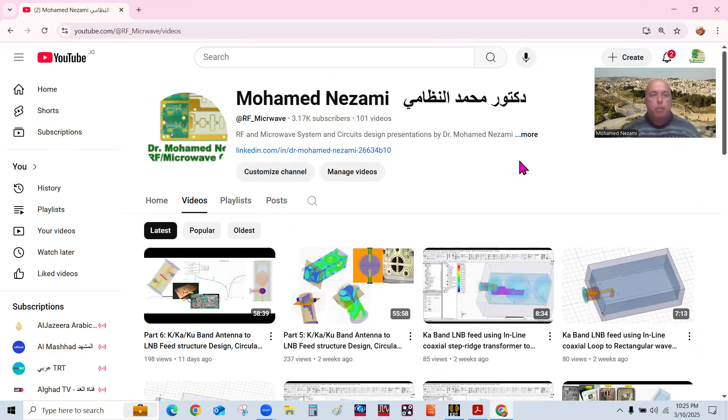Welcome back. If this is your first time watching one of my videos, I have this YouTube channel with all these videos, and I've been doing a series on KA, KU band antenna to LNB structure design, illustrating the design of the feed mechanism that goes between the horn antenna and the LNB, and the IF signal that goes down to the indoor unit, to the demodulator or modem. If you're watching this for the first time, I'd urge you to go back to these various parts. Today I'm doing my sixth part, and we're going to cover the design of KU band LNB using two orthogonal probes, pin probes.

So today what we want to cover, just to remind you what we're doing: I'm trying to find a spot for this picture, this icon, where I haven't yet covered the material. Basically, we're interested in designing and modeling the feed part that goes between the horn antenna and the LNB or modem, whichever you call it. It varies from large gateways for deep space, to sat-on-the-move, tactical, military, to VSAT terminals, and also to KU band commercial TV broadcast, direct TV.

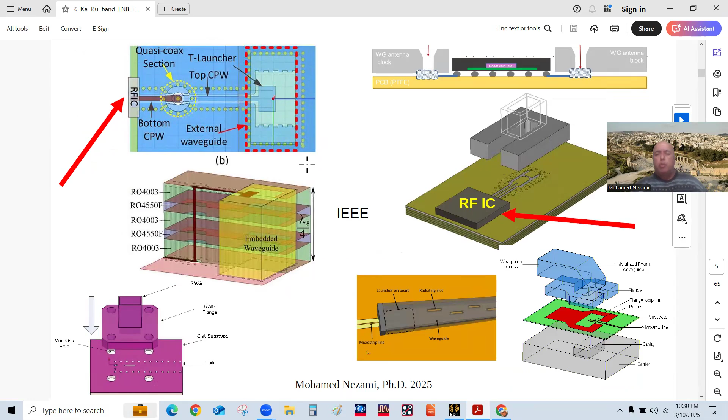The material I cover here, even though it's really intended to work with waveguides feeding from a horn, could also apply elsewhere. In fact, I will start a series in the future for antenna-in-package type systems, where you have an RFIC that you want to connect to an antenna on the same board. This is a technique used right now in flat panel LEO orbit SATCOMs for internet, such as the systems from the United States, from Amazon and from SpaceX. I grabbed these from the IEEE journal, and you can see how the RFIC gets connected to an antenna. This RFIC could be a single unit cell from a two-dimensional array of antennas, or it could be a single device also.

You can see various formations of waveguide to LNB or LNA transitions. Basically, if you look at these feed systems, they're always using a horn antenna that has a circular aperture, so it interfaces either a circular waveguide or a square waveguide.

Circular waveguide, circular waveguide, square waveguide in here. I can't zoom in on this one, but it's probably like this one, where you can see the circular waveguide. So we're dealing with either a square waveguide or a circular waveguide. The lowest frequency dominant mode is the TE11 for circular waveguide, both vertical and horizontal, and the TE01 and TE10 for square waveguide.

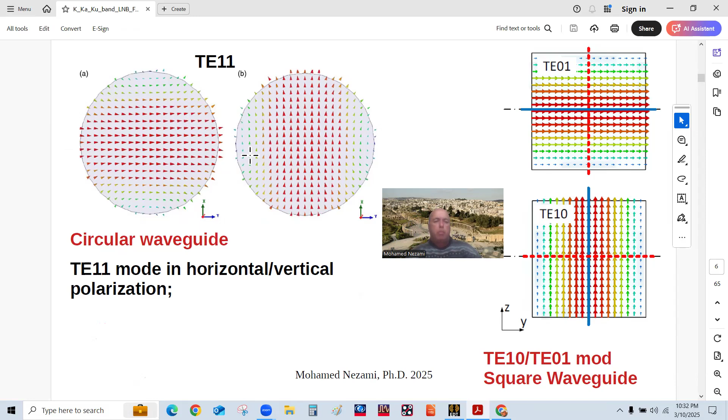I've shown analytically how this one is almost the same as this one, with just a small factor - the cutoff frequency is about 20% more or less between them. You can refer back to my previous videos on this.

So what we covered so far is the LNB feed types, right here - we have five types. The first type is where the circular waveguide comes in, we pick up one polarization here, and the waveguide behind transitions to a rectangular waveguide, feeding this. So you end up picking both vertical and horizontal signals, amplifying and down-converting them to an IF.

The other type is the circular waveguide with a septum polarizer. This septum polarizer is the mechanism by which we separate the two multiplexed signals - literally a diplexer between vertical and horizontal coming from a circularly polarized signal in circular waveguide. We've covered this in one of the videos, you can go back to them.

And then we also covered this one, where in the same plane you get two orthogonal probes, be it printed like this one, or coaxial as in this case. We covered this. So now we're left with this type here and this type here.

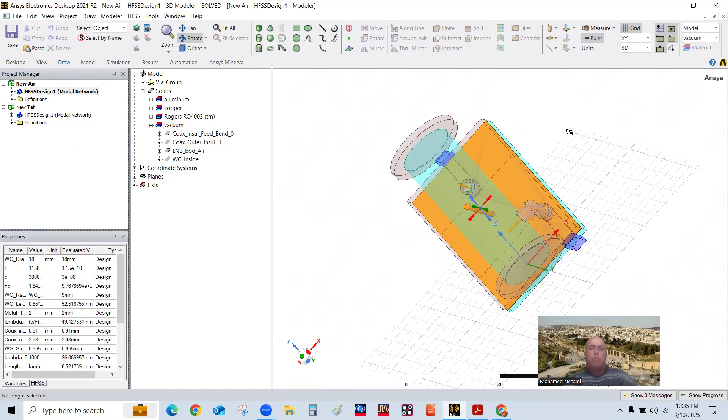All right, so this is basically what we're going to cover. Here's one of the designs I want to talk about today. Basically what this is, as we can see, is we've got a PCB board in here - this is really where the LNB sits.

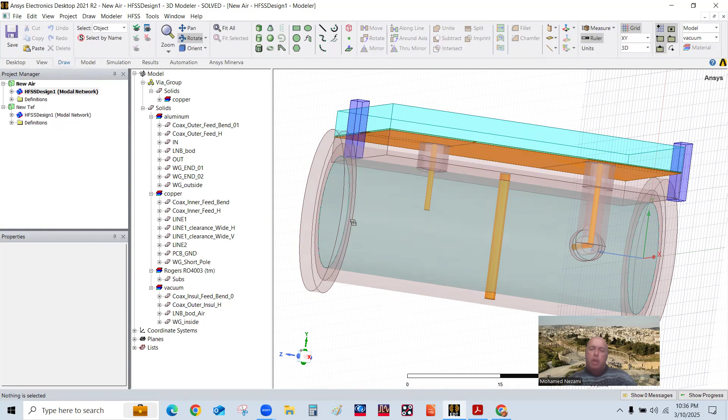I've got two transitions from microstrip to a coaxial-style pin transition that goes down into the circular waveguide. I've got a dowel in here, which is just a metallic pole that acts as a back-end reflector for this polarization, where the other horizontal one doesn't see this at all - it doesn't affect it and goes back, getting picked up by the second probe, which has a 90-degree bend. It comes in on the side, connects, and picks up the signal. This distance here is a quarter wavelength, and this distance is a quarter wavelength - a straightforward design.

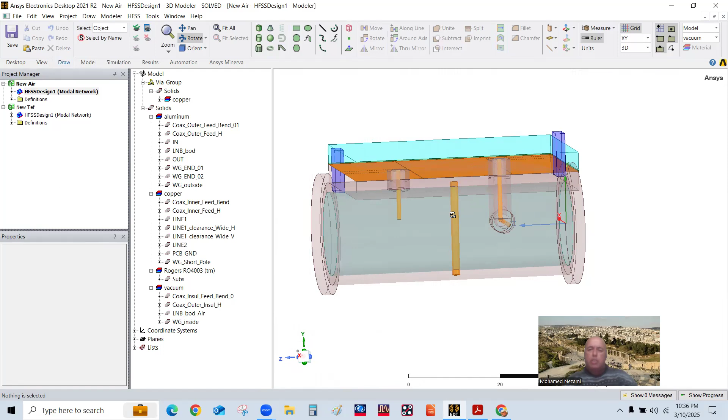The only thing is you have to really be careful about the design of this transition here.

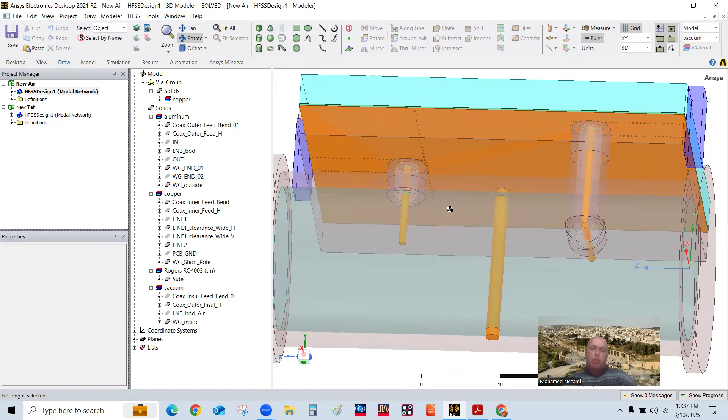As you can see here, I have an opening in the substrate, which is Rogers 4003. I've got a bunch of vias around the connection that connects the probe to the board on top, and source to the trace. This is basically implementing a coaxial transmission line on the PCB, because it's got an outer shield and an inner connector. The outer shield is grounded with vias connecting the top and bottom, and the bottom of the board is basically a ground plane completely. The whole thing sits on a ground slab, as you can see here.

So let's go through the material, this is what we're going to cover today. If you go back to my series videos, we started all the way from basic square and circular waveguide until we got to where we are today. Usually we designed first a septum, then we designed a coaxial to waveguide septum, and then we designed basically a diplexer type to pick up the signal from both vertical and horizontal.

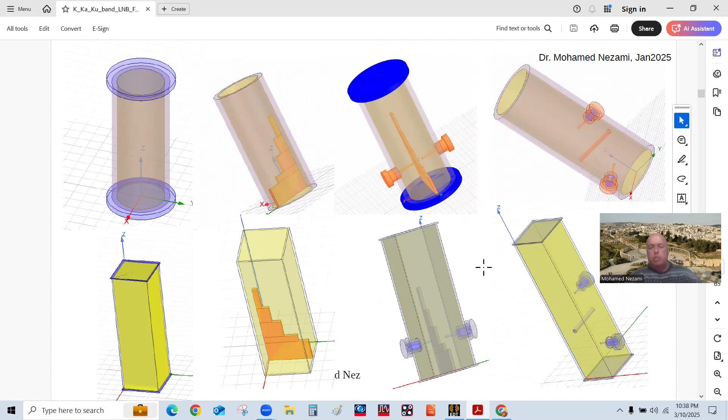So let's look at the first thing today, where we've got the horn antenna in here. The horn antenna collects the signal from the parabolic dish and then goes down into this circular waveguide. There's a little compartment in here where the LNB board sits. This LNB board's IF has an F connector right here, which connects to your indoor modem or SATCOM TV receiver.

And as you can see here is the board, this is basically what's inside once you lift the cover off. You can see it's got one probe in here, which sits right in the middle of the waveguide, and that's really what this one is - that guy right there. We have, well, let me go on the side.

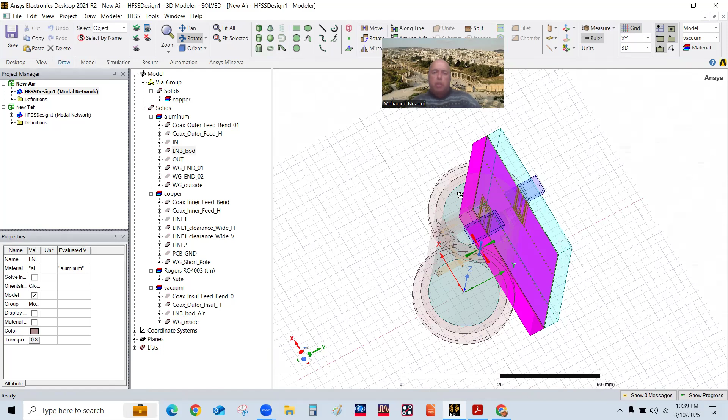So basically if you look in here, there's one probe that goes in right here, and there's another one that comes in that I just showed you. Let's look at it from the bottom view. So we've got this one in here that comes in with a 90 degree, and there's that one right there.

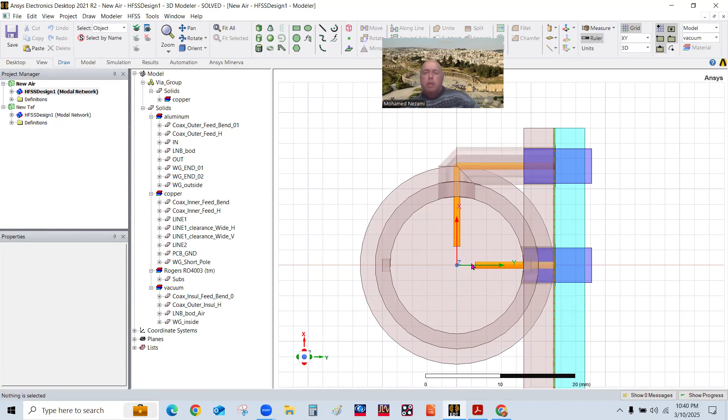Let me hide this, now we can see it more clear. So there's one that goes like this to the board, and there's another one - let me hide this post here - there's another one that is right here. So you can see that these two are basically connecting to the top of the board with the microstrip pickup line, which feeds the signal to these low noise amplifiers. So this one picks up the vertical and this one picks up the horizontal, comes on the side, down and bends 90 degree down.

And you can see their quadrature - so this one in here, if you draw a straight line to here, to the center, and up to the other pin right here, you can see they're 90 degree apart. That's really what we want to pick up the TE11. Now inside the feed horn, the way the interface to the feed horn, of course, we've got you can see them right here through one of the LNBs that I have right here.

I happen to have also right here, and you can see that there are two pins in here. Let me make this larger so we can see it. You can see that there are two poles in there, one vertical, one horizontal.

Between them there is a dowel that goes from top to bottom, which acts as a short back end to the vertical polarization. So we've got the one in here, that's horizontal or vertical, either one - it depends where you flip this. And then this is reversed: this is the vertical, and that's the horizontal, because the horizontal has a flexible slit to go in. This pole in here, this grid pole I call it, acts as a short, a quarter wavelength away from the vertical probe that picks up the signal, where this here is unseen by the horizontal wave that goes in.

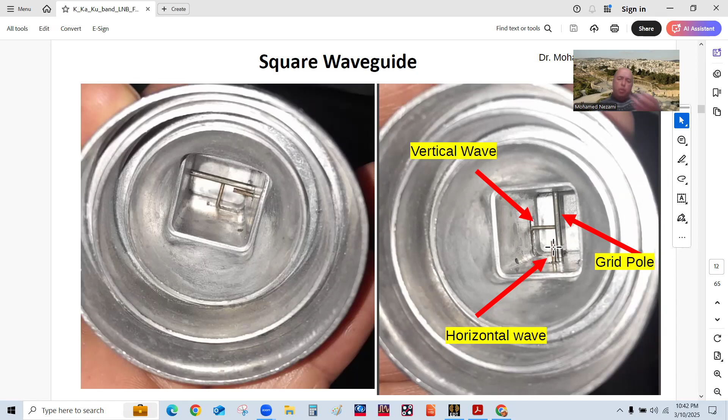So the horizontal wave goes in and doesn't see this pole in here, it just goes in and gets picked up by this. Then in the back of the waveguide, there's a quarter wavelength section, short-ended, that will basically act to reflect back any of the signals that propagate that way. Another view of this, showing you basically the same thing, okay?

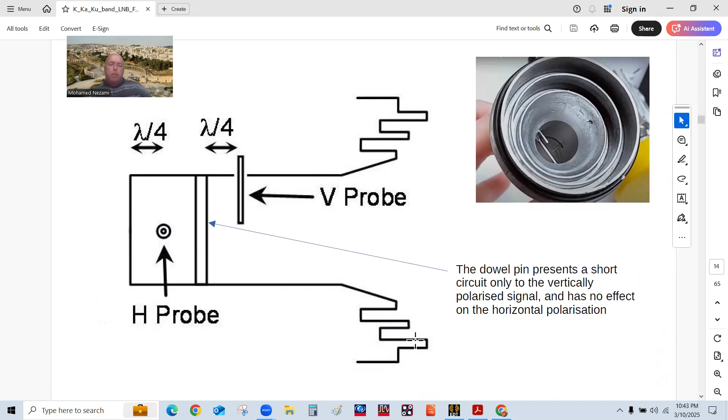Now pictorially, if you were to draw a schematic corresponding to this, we've got the horn, the corrugated walls in here, and then basically the first probe that goes in, okay? At a quarter wavelength away from this in the back, we've got a dowel pin that presents a short circuit only to the vertical polarized signal, and has no effect on the horizontal polarization wave that keeps going and gets picked up by this, which is basically going into the page, into the screen, okay? And then there is another quarter wavelength section shorted right here.

So in essence, if you look at this, the impedance loading from this pin from the back short in here is really open, because a quarter wavelength short, as I will show you in a moment, acts as an open circuit, so it doesn't see this. Yet all the signal goes in and gets reflected back, 90 degrees one way and 90 degrees another way, that's 180 degrees, and gets right in phase, sums up with the original wavefront of the wave.

Now the same thing happens in here. The signal comes in here, hits the probe, gets picked up, the vertical or horizontal one. If anything passes that, it goes right here and sees a short, dead short, and it bounces back and gets reflected in here. Now, likewise, this short here is at a 90-degree electrical length away from the probe, so it acts as an open.

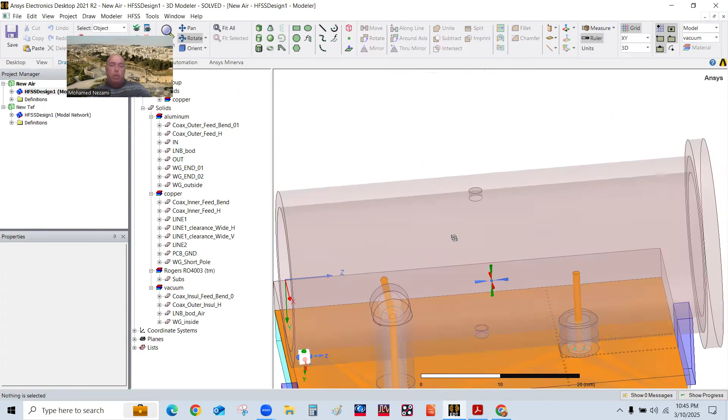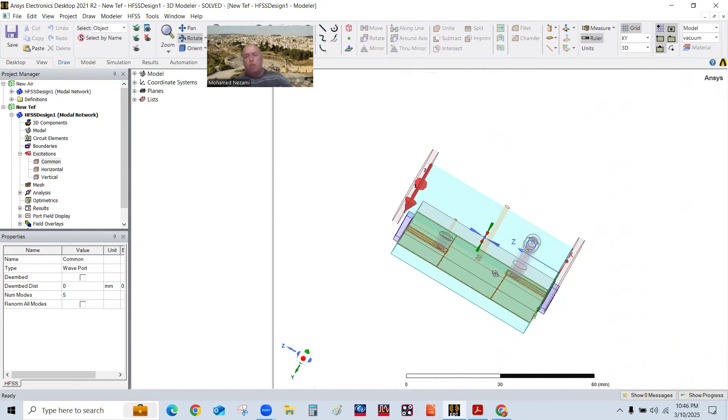For this one in here, you can see that if you were to look at the frequency response, the S21 on both of these, so you come in, let's see, no, not this one, let's start with this one here first. Okay, so we've got this one here, okay. So we've got the signal, the feed comes in through here, both vertical and horizontal. And then I've got another wave I pick up, in this case in here.

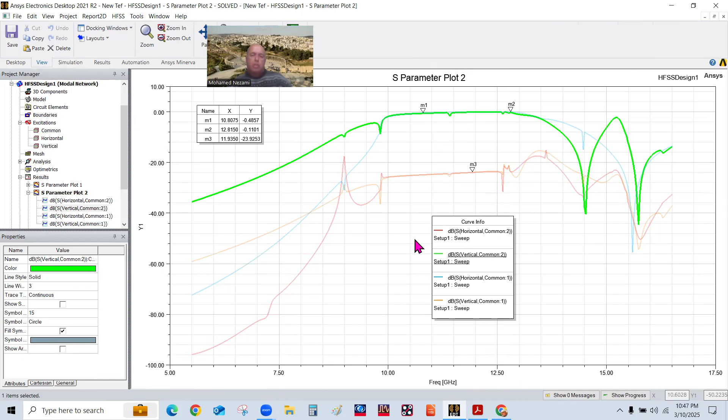What I'm doing, as I will show you in a minute, is de-embedding the transmission line in here, because I made this transmission line much longer than what you really need. You usually pick up the signal in a few tenths of mils to a few tens of mils, then feed right into the LNA, okay? So I will show you in a moment, as you can see here, this is the S21, both from the common mode, common signal, or the circular polarized signal, to the horizontal. So there's nothing for this wave. And for the vertical it's this one. The difference between them, of course, is in the 20s of dBs, and you want to maximize that. So that's the cross polarization considered in this case.

Okay, so let's cover more. Let me maximize the screen in here so we can see this. Okay, so I guess you get the idea of how this acts pictorially. So let's look at the square waveguide ones, okay? Even though today I'm only modeling the circular waveguide.

So basically, here's the board with the cover lifted off. You can see this cylindrical bump here, which is the outside housing for this pin that goes in at a 90-degree bend and picks up the signal for the horizontal portion.

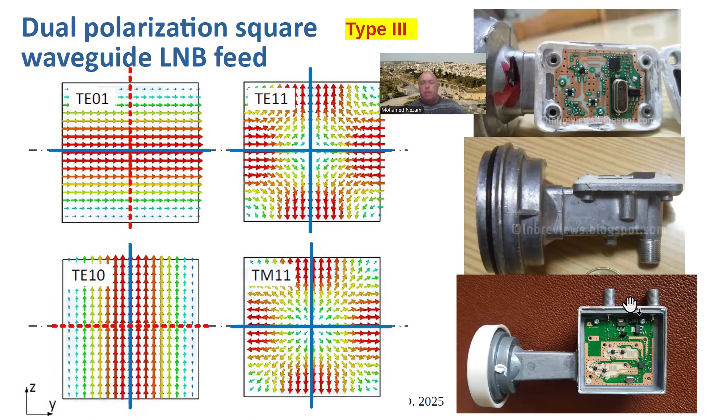Here's another variation, basically the same thing. For the circular one, I went through this a moment ago, so just to repeat: we've got one vertical pin here that goes down to the waveguide, then two stages of LNA MESFET devices, a hairpin filter acting as an image rejection filter, then into the MMIC down converter chip, and then into the IF signal, which goes right here. This here is for DC protection.

This is a Zener diode that clips the DC signal coming in from the indoor unit. Same thing on this side, you've got this pin that goes down and bends 90 degrees to line up and pick up the horizontal signal, then goes through two stages of amplification as well, with the filter here, and then into the low noise block down converter chip.

This contains the phase lock loop and the IF amplification stages, the mixer, and for instance this is the crystal, a 25 megahertz crystal, which acts as a reference for the phase lock loop. In some cases the reference is not internally generated, it comes in from downstairs from the modem, where it's disciplined via GPS

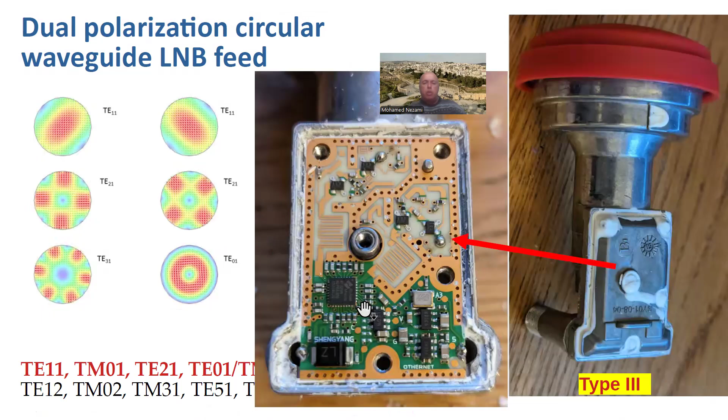Okay. So what I'm going to do in today's session is add a PCB board to this. This one was designed previously - you can go back to my other video where I talked more about this design.

So this is the bottom of the board. We've got the LNB board here, and what you can see is this: one is a vertical pin and one is the 90 degree. The waveguide comes on this way, this goes into it vertically, and this goes horizontally. You end up picking up both of these signals like in this one here and this one here, and you amplify and combine all the way until you go to the IF.

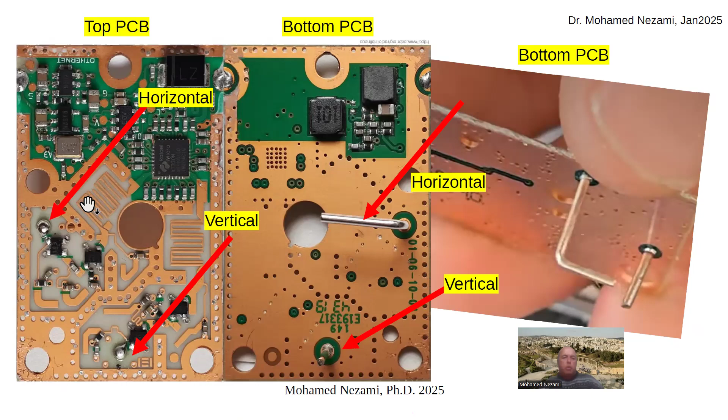Another view of these that I will show you in a moment, so you can see in the bottom both of the probes, okay, and this one uses this MMIC chip.

Another closer look at this type here, which uses a circular one. In this case, what you can see here is they put the reference oscillator, reference crystal, beneath the board. So this is basically what the probes look like that go into the waveguide.

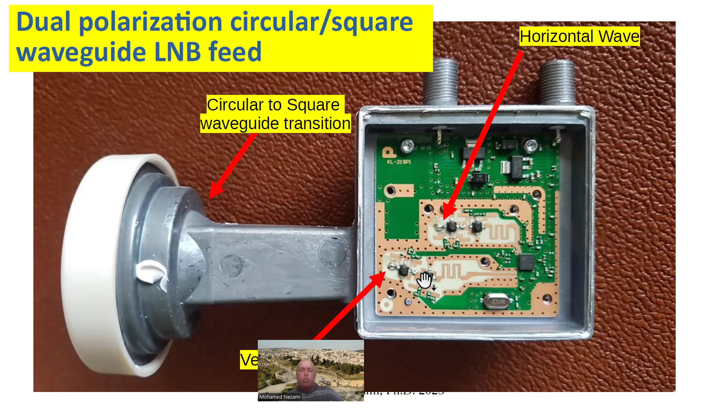Same thing for this one, very much the same. We've got one pin here, one pin here, two stages of amplification, two stages of a hairpin filter, and then onto this one here. Okay, the same thing goes in here, very much the same.

All right, so let's cover some principles quickly. Remember that the cutoff frequency for the circular waveguide is this one here, that's the coefficient from the Bessel function, the lowest order Bessel function, which corresponds to TE11, the lowest frequency dominant mode. And then for the square waveguide, it's really this value here, and this is TE10.

As you can see, it's A and there is no B, all right? And of course, in our case, A and B are equal because it's a square waveguide. And then we're using a microstrip line where the characteristic impedance of the line is dependent on the height to width ratio, and this coefficient in here.

Of course, we got the pins, both these pins are basically modeled as coaxial lines, the way they go through a board, okay? And that's what I did in here, basically. If you look at this guy in here, that's a transmission line, basically. This is it. In here, you can see the purple is basically the insulator, okay? And this is the inner conductor that goes in here.

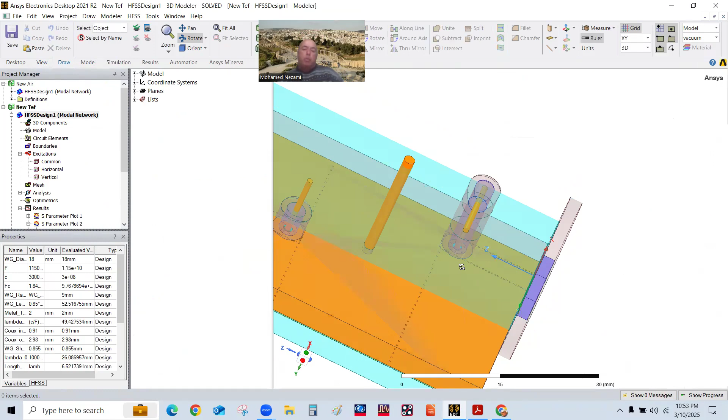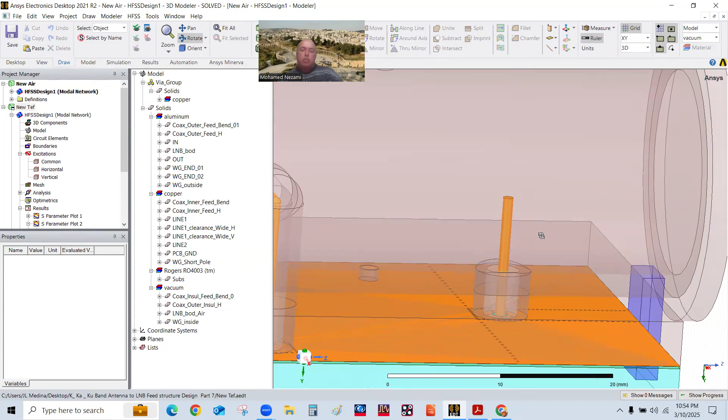So what I did, depending on how you want to do this, is between the inner and the outer, you use an insulator or you don't use an insulator. And that's why I have two designs. I have one called air and one called Teflon. So in this one in here, I did not use an insulator. And so you end up with a lower loss line because basically it's a coaxial line without the insulator - there is no insulation material in there, so there is no dielectric loss.

So you pick up a few tenths of a dB better on insertion loss with this one. And I'm going to show you that in a minute when we get to this.

So if you look at the probe itself, that's how we design it, depending on this - the outer to the inner diameters, and with this coefficient in here with the insulator, the impedance is divided by the square root of the permittivity of the insulator. So if it's air, this is basically 1. And the cutoff frequency is given by this.

Okay, so where do we put the probe? I went through this in the previous videos. So basically, if you look at the propagation of the E field and the magnetic field in the TE10 mode, you can see that the amplitude of the E field and the H field is really proportional to a sine wave signal.

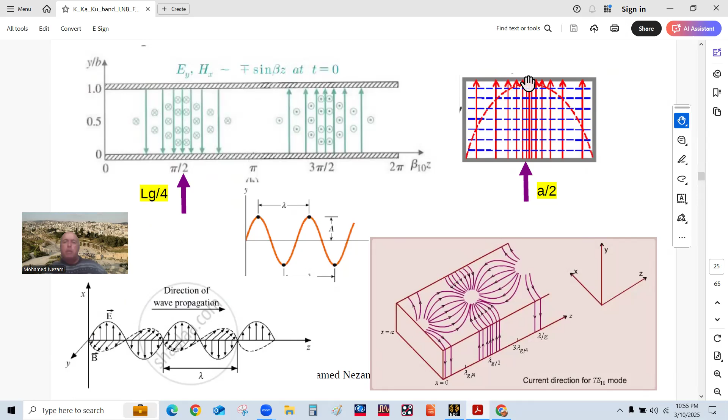And that basically goes in like this, and then goes up and goes again like this. So you get places where you can put the probe anywhere you want, as long as - if you put a short in here, you really want to be further away, a quarter wavelength, which corresponds right at the maximum field intensity point. So we want to be at the middle of the waveguide and a quarter wavelength away alongside the propagation path. And you can see that from the current density as well in here.

All right, so pictorially, and I went through this more times - basically what we want is a quarter wavelength short in here from the probe. And the same thing, this is short. So quarter wavelength from this probe, the vertical probe and the horizontal probe.

And if you look at the transmission line input impedance of a quarter wavelength line, you substitute the length in here as quarter wave, you end up with this equation, which basically says the input impedance of a quarter wavelength waveguide section is the characteristic impedance squared divided by Z load. And in this case, Z load is 0, so that means the Zin is actually infinity.

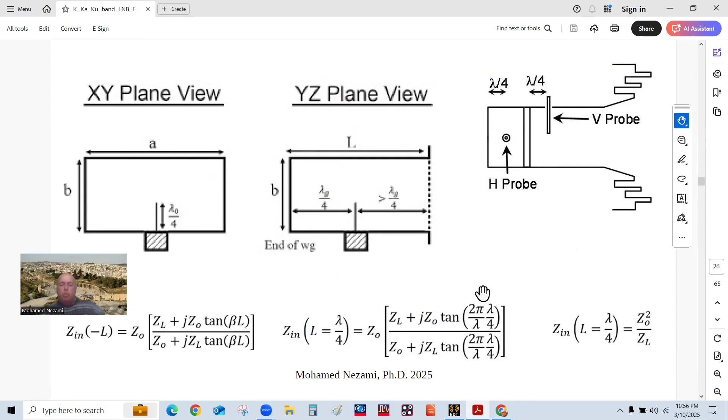And of course, now in the optimizer, when I run this in HFSS, really the back end, the short back end - okay, this one is missing some parts. We will put this back, show you, put back the other stuff.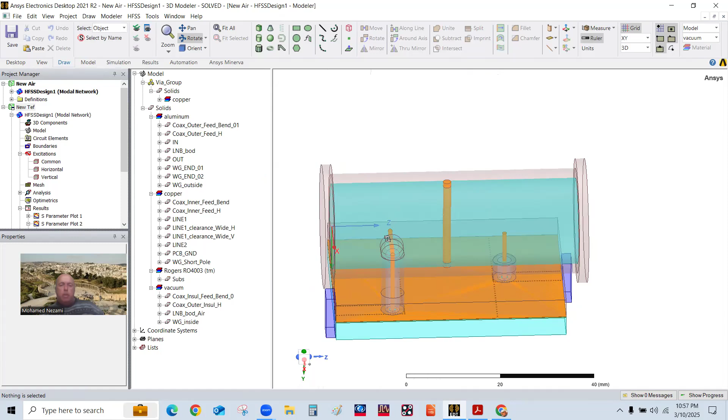Okay, so basically that's the quarter wavelength line distance, or distance from the horizontal probe in here - this one, we put it, initially you start out putting it at a quarter wavelength. So we can see here the back short distance, in this case, I put it as a quarter wavelength away from.

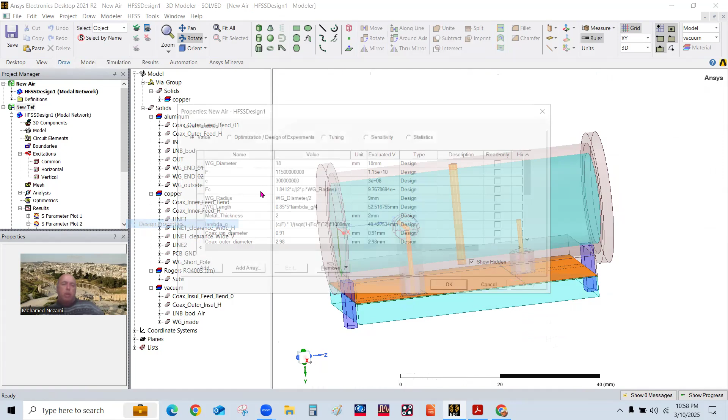And you will see in a minute that it's not exactly where it resonates at the frequency that I wanted. In this case, I ran it for Fc - let's see, F is 11.5 gigahertz. And that is because ideally it's loaded with more stuff, loading parasitics in there because of these things.

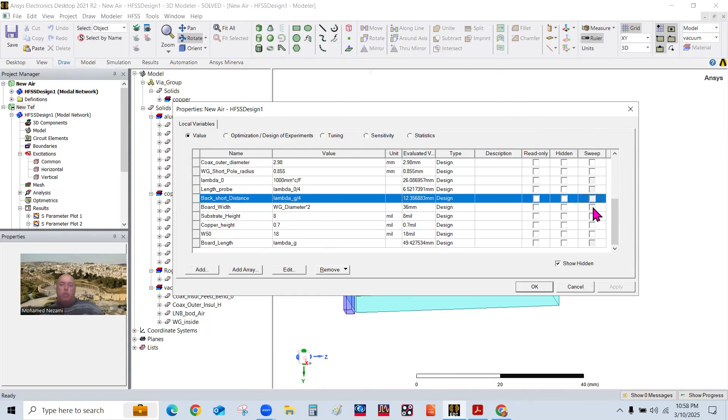So what you want to do is go into these coefficients, and come into the back short distance that I showed here. You basically make this tunable, and sweep it, either by hand to tweak it and get the feeling where it should be, or you can run the optimizer on this. You go in and add an optimizer, and that's what I did to get some of the final designs. You'll see that in a minute.

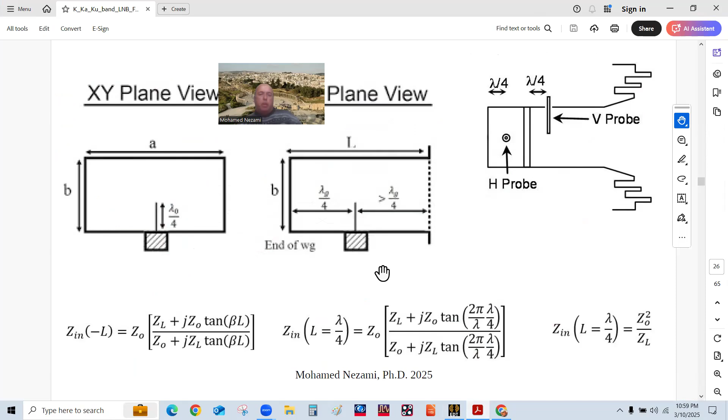All right, so that's a little theoretical background. Let's get to the first one. I'm going to talk about these slides, which you can download from LinkedIn. I have them there.

Let's start with the first one, the insulated probes. The probes have an insulator from the outer body, Teflon basically. This is for the vertical and horizontal. This is the basic structure, and I'll go through it. This is the board on top. I stitched some vias in here so that I get more isolation.

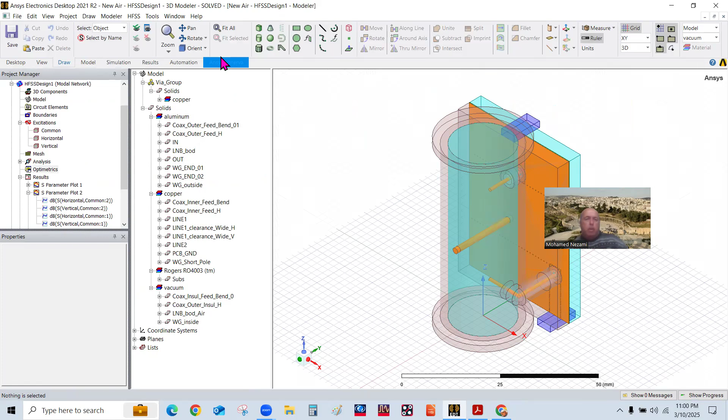It turns out this is really very critical, and you can see that from the layout. You can see the compartments here? They are so critical. Even the vias—let me go back to the board. You see these vias in here? They're so critical. Right now I don't have them uniformly around the circle, but they're sufficient. These are critical to the isolation between this probe and this probe.

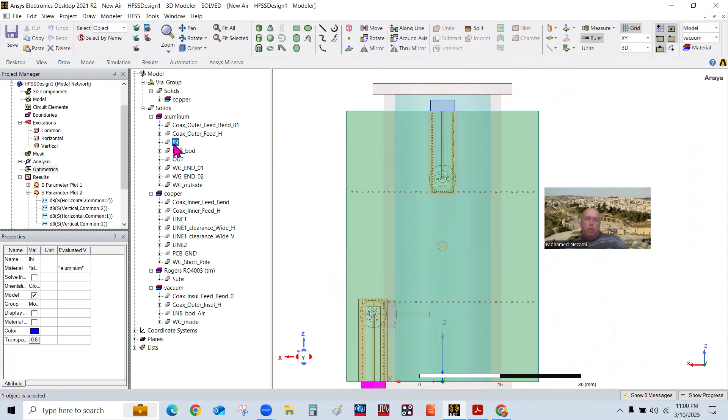And the signal leaks, and there are more—as you can see, let me see—these ones, there's more vias in here that I had to stitch to get to this, and that's why you see this on the layout. Whoever did this layout made sure these probes are surrounded by stitching vias so that the signal doesn't leak to the other side.

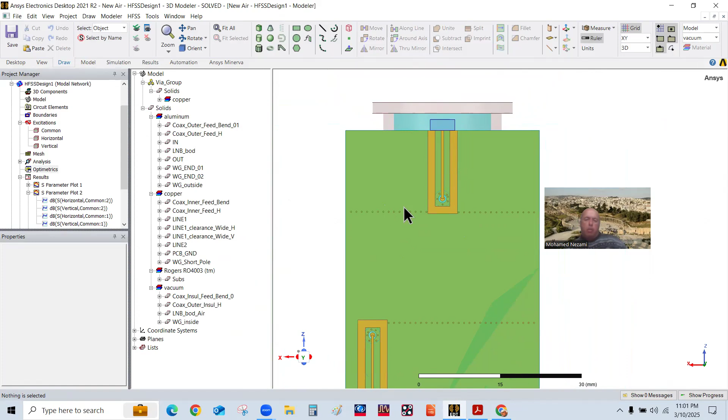Because this probe and this probe can easily get surface propagating signal that crosses between them, and that distorts the signal. In fact, that's one of the system level studies you would do: create a model of this and pass it to the modem designer, tell him this is my isolation transfer function between the vertical and horizontal, see what impact you can get. So it's very, very critical, the layout of this, and that's why HFSS is beautiful for assuring it.

I almost spent more time doing this detail here to get it to work than I did designing the whole thing from the ground up. Okay, so let's go and just look at this.

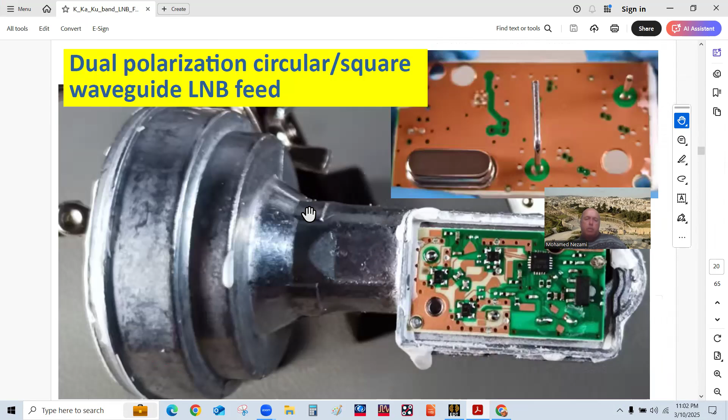As you can see it sideways, how it looks like—this is how it looks like, the metallic work. And this one on the side here is the one that picks up the signal. That's what you see here. Let me show you, let's see one that shows it. This one. Okay, here we go. Here it is, that's this guy here.

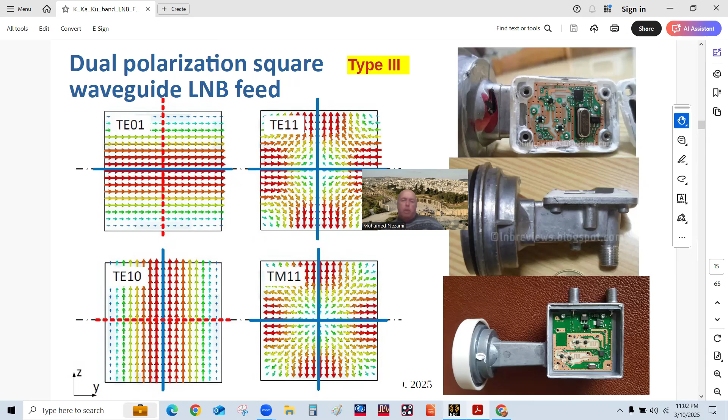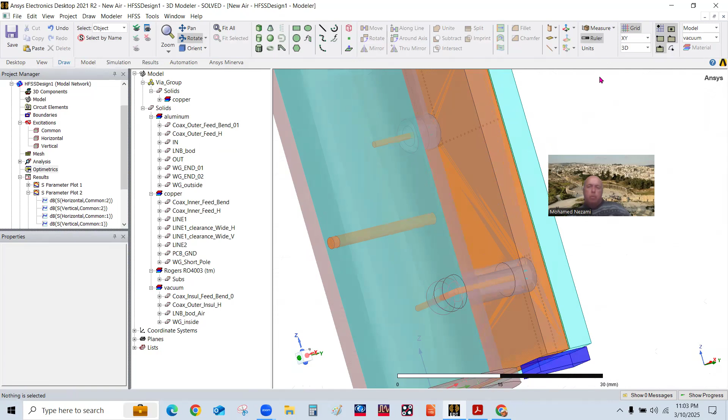You can see it. In my case, I did not draw it exactly completely off, so you can see there's a little gap in there between the body and the... let me do this. Let's see, aluminum, select all, and let's go a little like this. So you can see that's what the side in here shows.

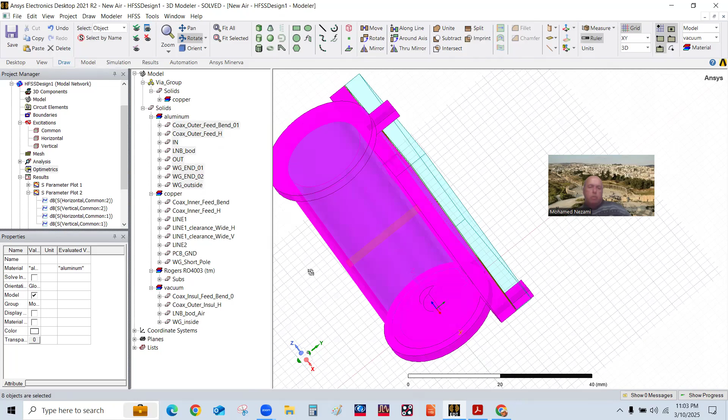Let me go this way, we gotta go like this to see it. So you can see that I'm not seeing it like this. Interesting, so let me take it and make it completely zero transparency. All right, you can see that I have a little gap in there. Can you see it right there?

Now, of course, that's just for me to simulate the electrical behavior, but in actuality you can't really do that with a CNC machine or even aluminum die casting. So you would want this to be completely solid with the body of the circular waveguide. Let me just make this more transparent so we can see the other stuff in there.

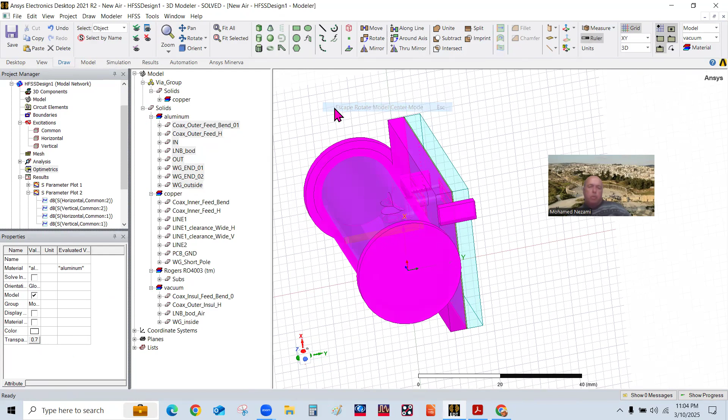Okay, let's go through this. Let's get back here. So in this view, you can see what this one here is, this one in here, okay? And you can see this one in here is that one right there.

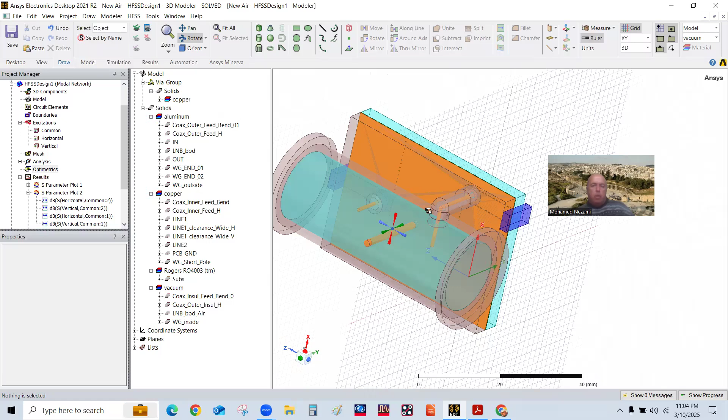The other thing I want to warn you about is this hole, this clearance here, which is really part of the characteristic impedance of the transition between the PC board to the actual coaxial line section in here, which is the probe in this case, or the probe feed. The probe is considered this piece here only that really enters the vacuum of the waveguide. But this here is part of what's considered a coaxial line feed.

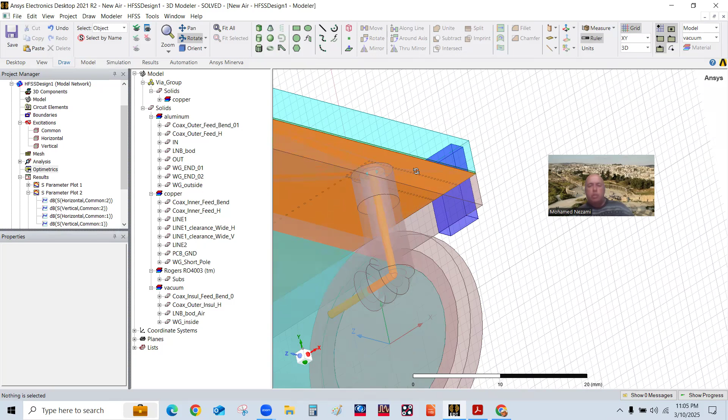But there's another coaxial that is printed, basically this one here. You've got to get the signal from a microstrip to a coaxial PC board, printed coaxial, and then to an actual coaxial. So you've got three transitions right there that you really have to make sure work well.

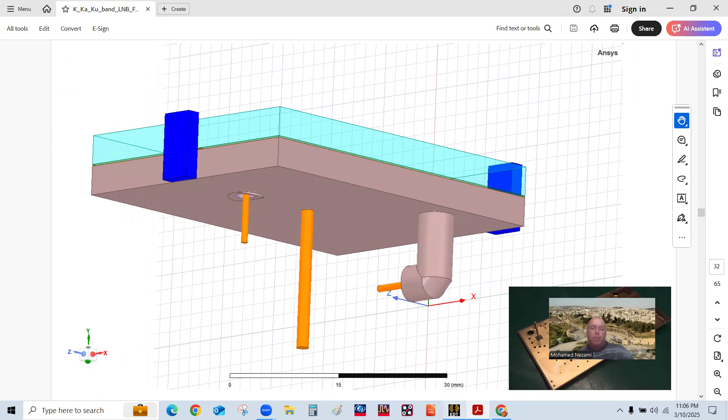So I ran this, and of course the first thing we want to look at is the return loss, for the vertical and horizontal. You can see they're not tuned at the same frequency, and that's what I meant by saying that due to all of the loadings you have to deal with in here, you really have to run the optimizer to get these lined up.

So it becomes tricky. This is basically the insertion loss and the isolation. You can see the transmission for the vertical and horizontal from the input, meaning what I do here, this is sweeping. I sweep basically from the common port to the vertical and to the horizontal at both modes, because I'm running 5 modes. If you go here, there's 5 modes that I'm running.

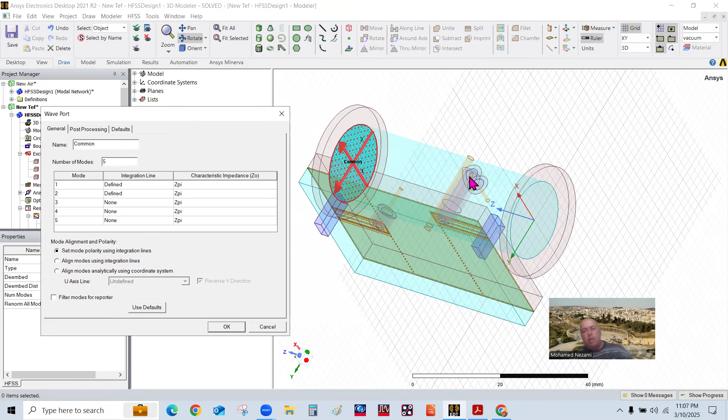I'm just interested in the first 2, these guys right there. Let me go back. I'm interested only in these 2 in here, to see how they propagate to this point and to this point, and that's what you see in here basically.

You can see the insertion loss is 0.5 dB, which is good. We're assuming we're going to get an LNA of about 0.5 dB and 0.5 dB here, so that's a dB of overall noise figure for the LNB.

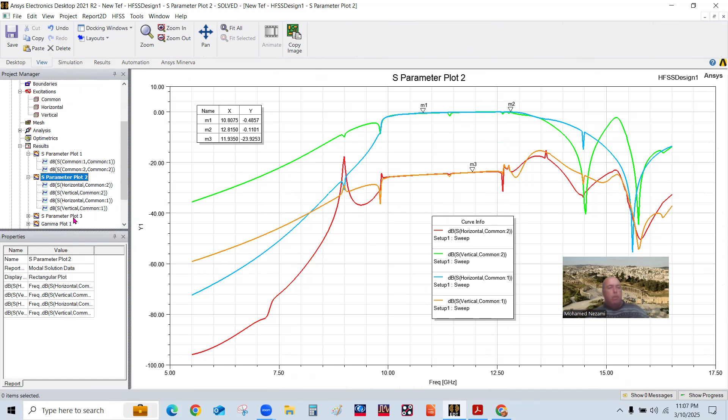And then I'm running this for the vertical and horizontal, the microstrip, running this for the modes. I'm just trying to make sure here that I'm operating between 2 modes, the lowest mode and the highest mode, so that I don't excite higher order modes. The impedance looking in, you can see it's 50 ohm, and of course the waveguide is 750 ohm.

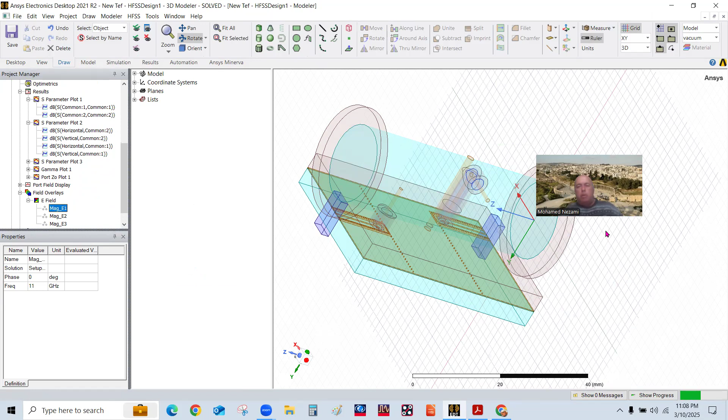So that really, what we can see next is let's watch some movies. Let's see how the E field propagates into this. It's going to take a little bit, so let's do something else. Let's look at it here until this one solves.

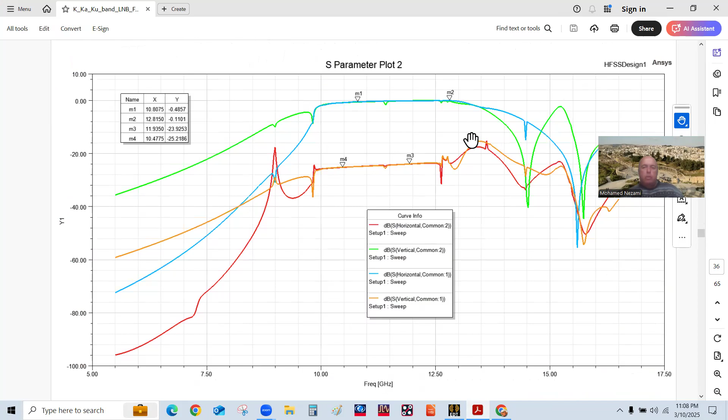This is the result I got. So we got this here, the return loss. This one we got. And then we got the E field, and you can see the E field. I'll show you in a minute live where this is. As you can see, the horizontal signal is being picked up by this probe and the vertical one picked up by this probe. And on top, you can see in the substrate that you're getting really a little bit of leakage between the two channels.

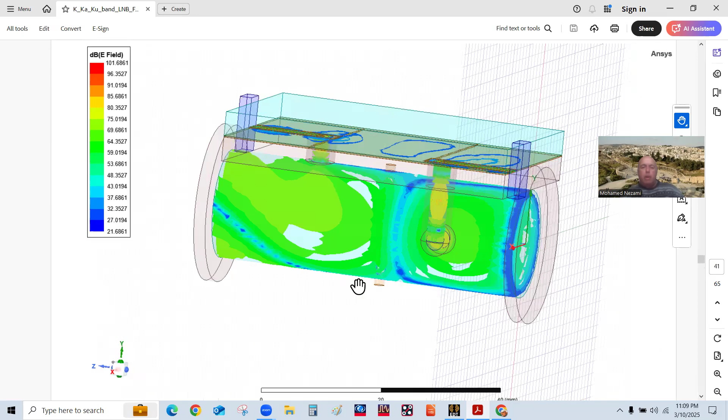Ideally, it has to be the middle of this pattern here, because this pattern repeats every half wavelength. So the middle of that is really where you want to be, because this is a short end in here, and from the short end it has to be a quarter wavelength. That's why this is running at 11.5 gigahertz. So when you look at this, you can see why the system is not tuned to 11.5, it's more like 12.5. It's because there has to be a little adjustment on the location of this probe.

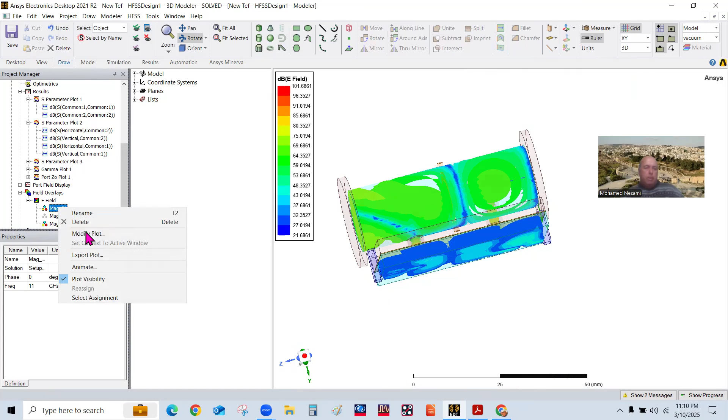But I said to myself, that's enough. So okay, here it is, we've got this going. Okay, why is it not running? Okay, because I'm not animating. So hold on, let me turn this off and let's just look at this one in here, and I'm going to animate this so we can see it.

All right. Okay, let's see some stuff until we get this one.

So the next section, I'm doing this with an air-filled probe, meaning the vacuum in here is air. A lot of these LNBs that I've looked at, you can see here is the insulator, and they are really doing a small section of insulator. So this is a true coaxial one. This one, it must have fell off - the guy must have dropped it while pulling this away from the structure, the assembly.

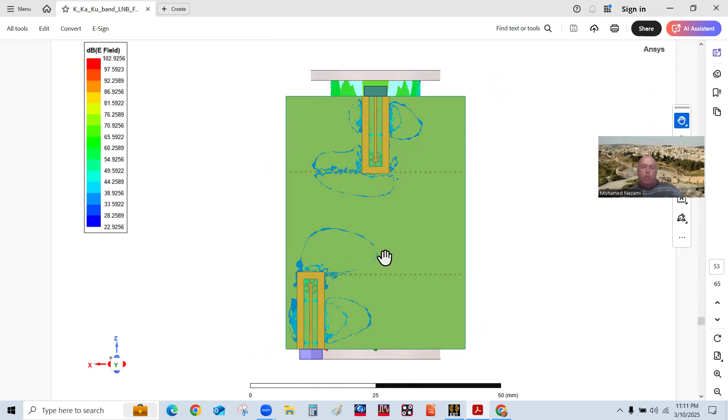Okay, so the other one for the air-filled, basically you can see that this is right on frequency. Oh, this is almost half. And you can see the pattern from underneath, so you can see 0.1 of a dB instead of 0.5 dB. So you can get much lower loss than you would get. Of course, shift back to 11 and a half, as you can see here. This is closer, so the insulator does shift the frequency a little bit.

So let's go back. Must be still running, okay, it's trying to solve. So let me talk about something else until it's done.

So basically, with this, I have covered all 5 types in this series of 7 videos up to now. The only thing left is this type in here, and this type is interesting. I'm excited to see how it works.

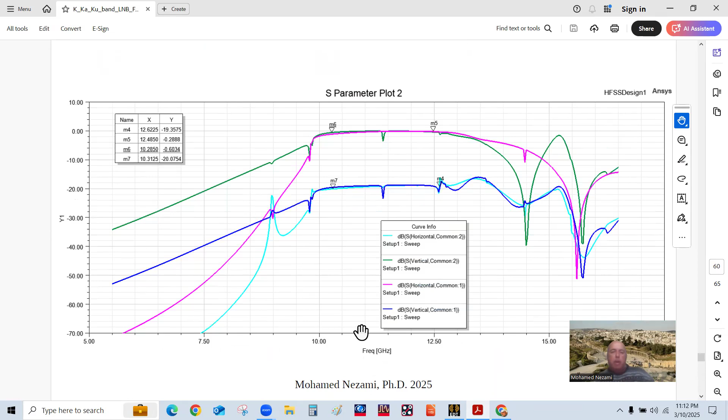Because this one in here has a benefit over this, in that there is really no distance between - it's thinner than this, because in this one you need spacing between the horizontal and the vertical. In the middle here, there's that pin, the back reflection pin, which is inserted. You can see this pin in here, this dwell here, you don't need it, and it's printed.

And so the way this works, let's zoom in on it here. One of the probes is printed. So it goes in here, you amplify, and then you go further into the down converter. And then there's this piece in here, which behind has a ground post. This is plated, ground plated. You can see the ground stitching, the vias in here and vias in here. And this is also grounded from the back. So this acts as a back end reflection for this probe in here.

See this solder bulb in here? That's a metal pin that goes in and has a 90-degree bend to pick up the horizontal. So this picks up the vertical, okay? And then this vertical, the back end short is the cover, the lid on this. So the lid comes in here and covers this, and the distance between the ceiling of the lid and this printed pin is a quarter wavelength.

But for the second one, we've got this one in here. Remember, the wave is propagating from that side coming in here. And in this one it got 90 degrees, and the back short for this pin here is really what's between - it's this here, because it has a printed pattern on this side in here. You can see that on the next part.

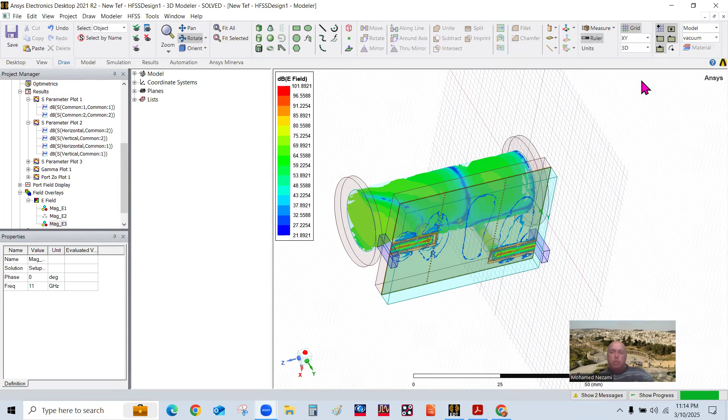So what I'm going to do next is model this and show you how this one works. So hopefully, let's see if this is - this is still running. So let me see what's going on here. Okay, so basically, let's see. We got this running, so let me try to get this picture as large as possible so we can view this.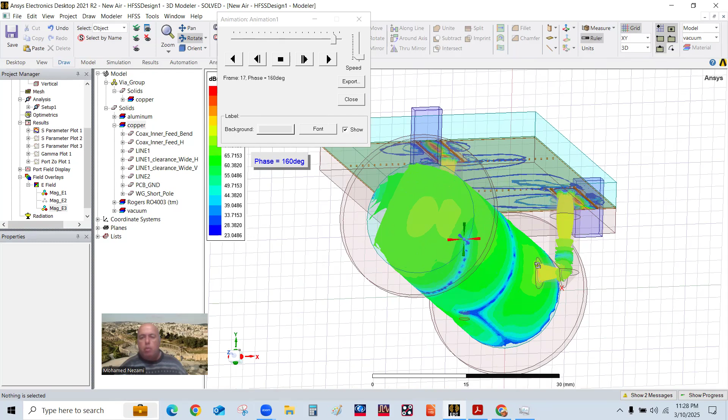Okay, so basically what we have right now is we have a counterclockwise signal going, okay? And you can see the propagation is going counterclockwise. You can see the signal going in. And the first thing is, of course, the one on the side here is what's picking the horizontal wave, okay? And the other one is this vertical in here that's picking the vertical wave. So we can view this from various sides. Let's see this here.

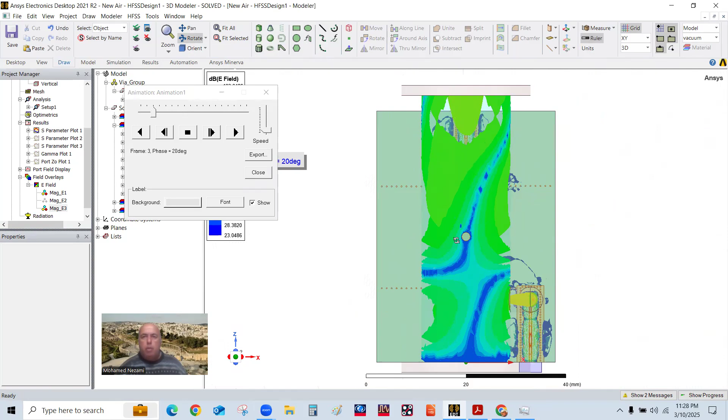So let's fit it all. You can see that the signal comes in, propagates, and then goes in. And this right here is the metal back. This is the back end short for the vertical polarization, okay? Where this one here is the back end of the waveguide for the horizontal.

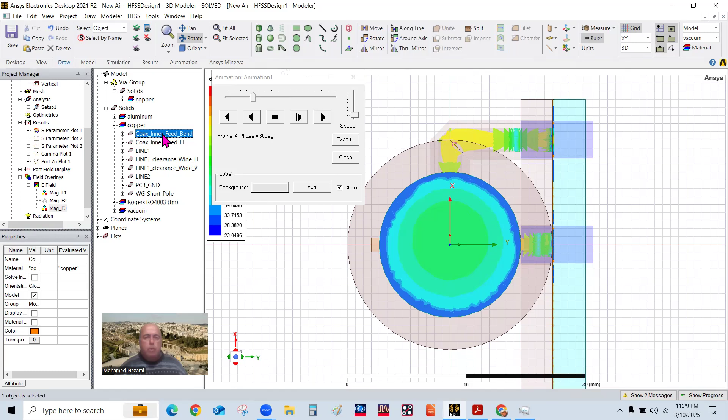So if you look this way from the bottom, you can see the waves are going in. Basically, this is what's picking the horizontal, and that's the pin. No, the horizontal pin is, let's see, this is copper, so we got line one. No, that's horizontal. Let me just make sure I have everything on.

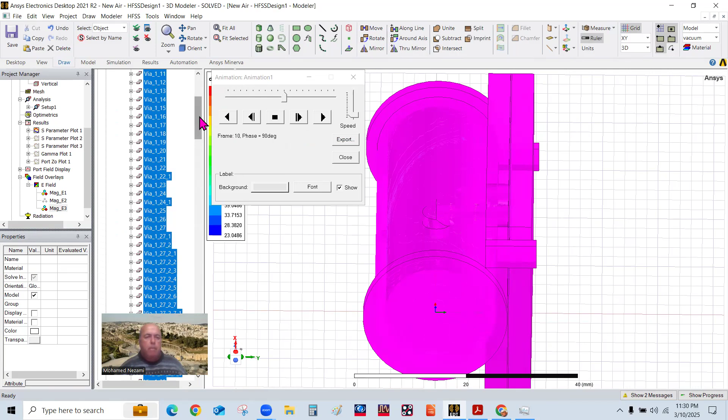So got a lot of vias in here. Okay, I see what's happening. So let me just try to pick it up. Just can't see it from the... okay.

So let's look at it from the back. Okay, you can see this one here and the other polarization. Left side, we saw that one. Okay, and let's go to the top, of course.

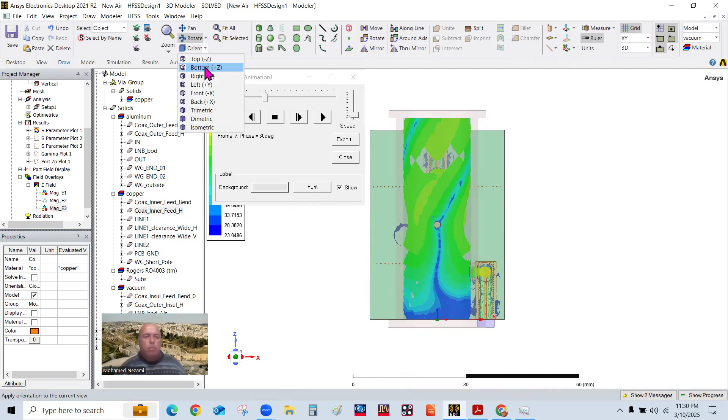And as you can see now, this is the injection point. This is where we inject the signal. And that's basically the common part right there. So you can see the signal is coming in here. And then, of course,

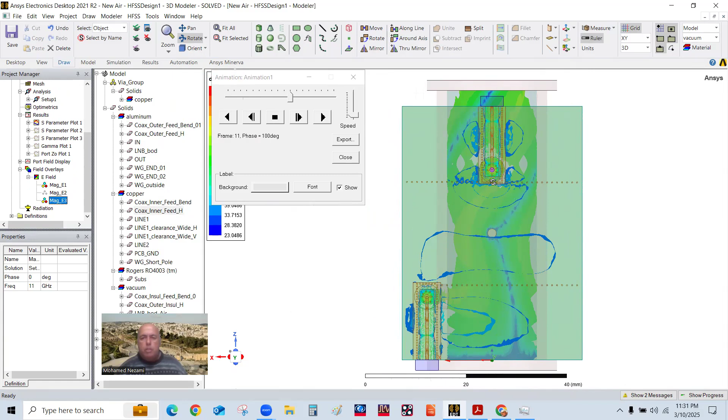you can see that the first thing is going in and gets picked up by the vertical one in here. And here's the propagation into the microstrip line. This is the synthetic, or simulated, PCB simulated coaxial transition, okay?

And you can see that on the other side, okay, this is the metal back end short for this guy here, for the vertical. And this is for the horizontal, signal is being picked from the side, off the side, as you can see, through a 90-degree bend.

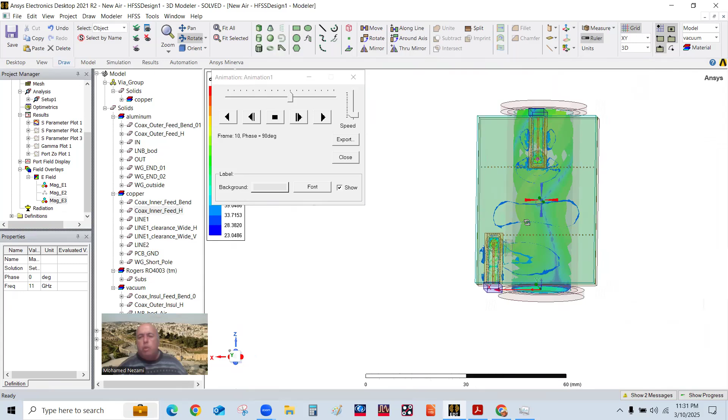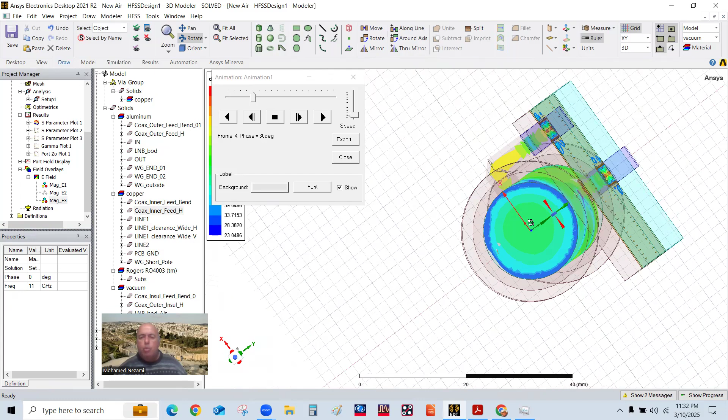And so that's why when you look at these things, there is no way to match the SNR between the two various polarizations, because really it's naturally that this feed here is longer than that feed. This one basically just runs straight down, where this one has to run straight down, has a 90-degree bend, and then it goes through an additional section to go through the waveguide outer metal into the waveguide. So you can see that.

Okay, so now that's this. Of course, this is running counterclockwise right now. I could run it for the other polarization, just change basically a 90-degree to minus 90-degree.

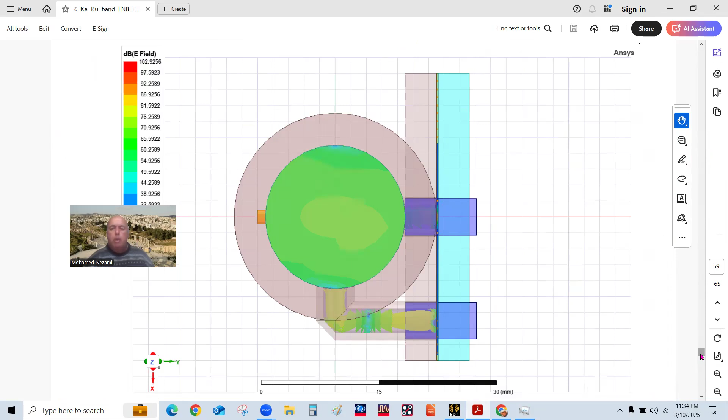Okay, so what we talked about today was interesting, and I hope you enjoy this. There's still more work to do on this, more optimization I could do, but for right now I'm just going to stop it. I illustrated the principle of this, how it works, and I'm very satisfied. So, like in this case, this one was for the air-filled one. This one was okay, the isolation was about 19 dB. I noticed that there's a little trade-off between the insertion loss for the air-filled one and the isolation, okay? And so you might think, why that is. If you have any ideas on this, please leave me a note.